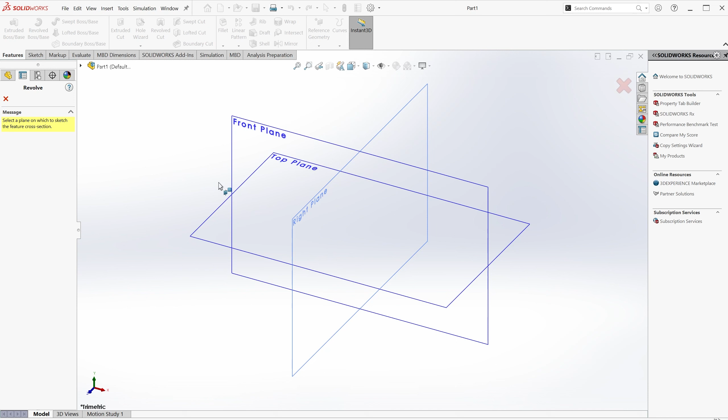As always with SolidWorks, everything begins with a sketch. So right now we've got an empty drawing. I'm going to go to the Revolved Boss Base feature and select that. I'm going to do this on the right plane this time.

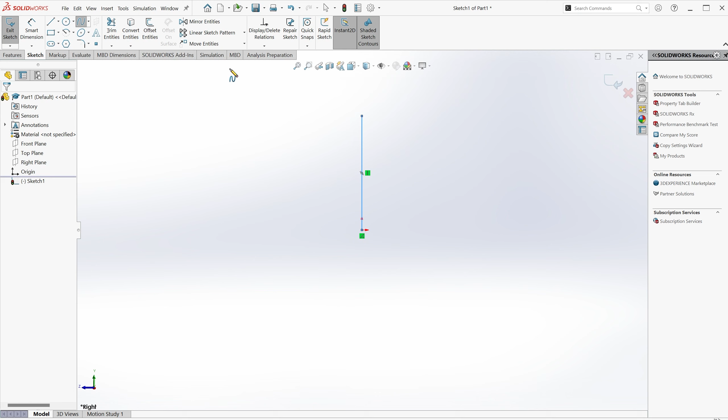Now what you want to do is sketch the side profile of what you want to revolve using the normal sketch tools, and what I'm going to do is just create a couple of different circular shapes and maybe join them with a spline.

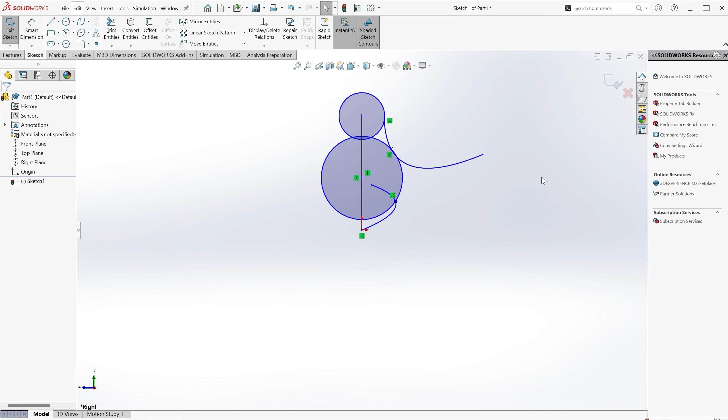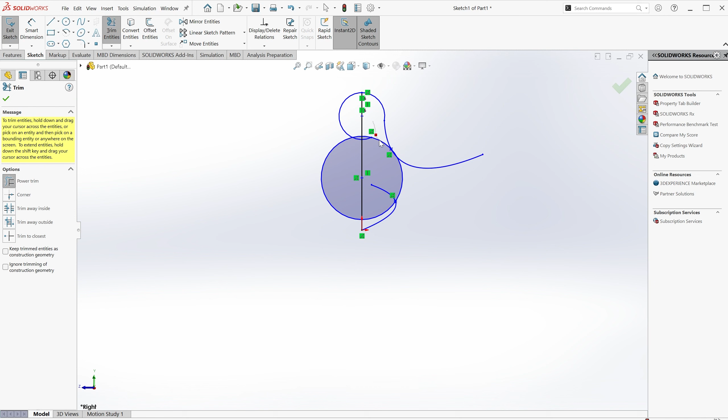So one of the key things for using the Revolved Boss Base feature is that you'll need to make sure you draw the profile as a half. So at the moment I've got the side profile roughly what I want. Just going to go and use the power trim tool to remove some of the additional lines that I don't want.

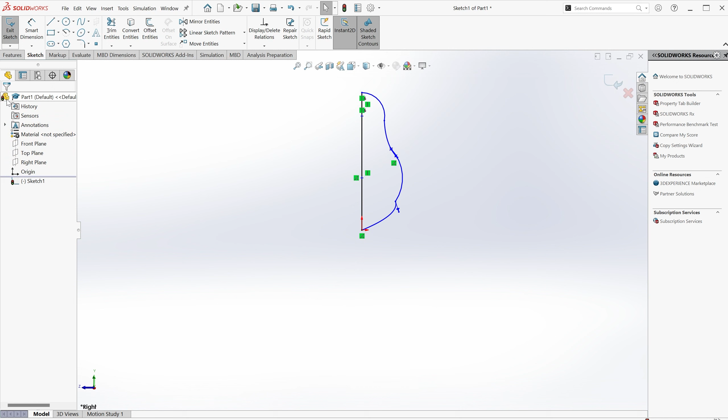And you'll need to remove those lines there so that you've got just a half profile of the sketch you want to revolve. And once again, click the tick to complete, exit sketch.

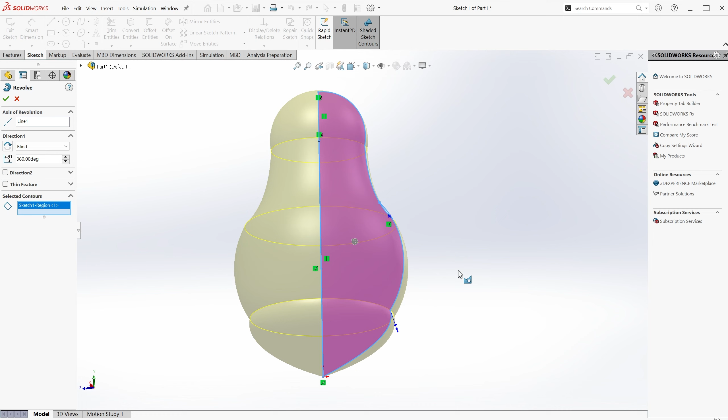When you get into the revolve feature properties, there are a couple of things you're going to need to specify. The first is the axis of revolution, which is that straight line straight up the middle, and the second is your selected contours. Click the tick to complete, and there you have it, your revolved boss base.

As you can imagine, sketching that as an extrude would have been very complex, but using the revolved boss base, this is a piece of cake.